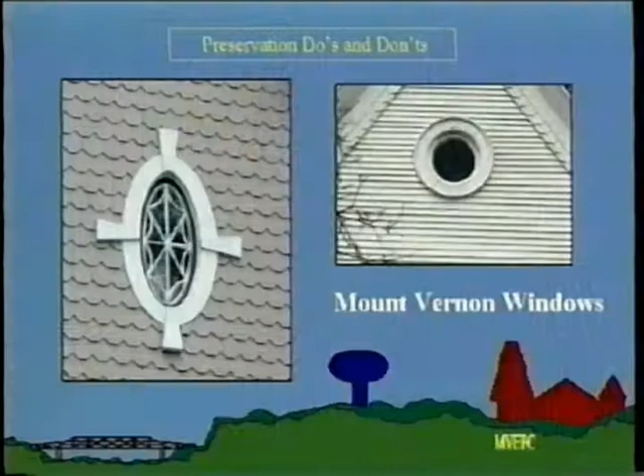I probably spent two days driving around, and we have some great windows in Mount Vernon, ranging from the oval oculi with multiple divisions to Gothic revival type of windows, arched windows, circular, semicircular.

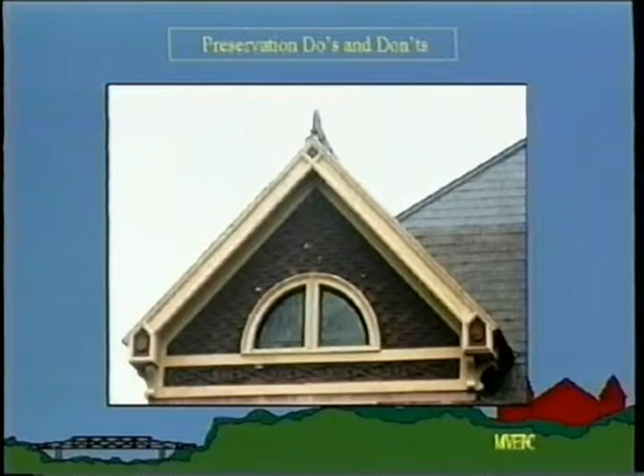There's a couple of neat, what I call eyebrow windows. You know, you see the roof plane sweeping down, all of a sudden it looks like there's an aberration in the roof that comes up, and there's a little window stuck in there. It's one of those things that until you go out and drive around town with the specific purpose of looking at what's there, you don't even notice it.

And I've lived here for 25 years, and unless I go out and specifically look for a specific feature, you don't see them. I mean, I always knew that there was a Palladian window. That's the window with two rectangular windows on the side and a middle one with a circular arch on it. I always knew there was one of those on the Kepler house, but I found two others in town that I didn't even know existed.

So until I went out with the specific purpose of taking pictures of different kinds of windows, I didn't know they were there. So just from a practical standpoint, the next time or even during the noon hour, if you want to go for a walk around town, you don't have to vary too far from our business district here to find some very unique windows.

But anyway, the first thing you do when you have a window in an older house is you want to perform an evaluation of that existing window. First of all, is this an original window to that house? That's an important issue, because if it is, it takes on more importance than if it's a window that was installed in that house at a later time. Just because it was installed at a later time still doesn't mean that that's bad.

I lived in an 1850s house out in the country. The original openings were still there. The front of the house, they'd replaced all the windows. They were a 6/6 muntin pattern, but somewhere down the road they decided it needed a sash replacement. So they replaced it with a sash of the same size, but it didn't have any muntin patterns in it. If you're going to do something like that window, it doesn't necessarily mean you have to go back and replace that sash with a 6/6 sash. You're probably still better off taking the one that's there if it's in good shape and fixing it.

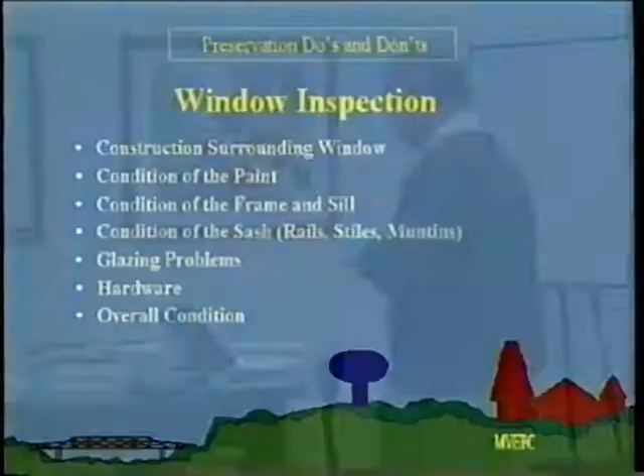Now the next thing, which is getting down to the more nitty-gritty, is to evaluate the condition of the window. The first thing you do is take a look at the construction actually surrounding the window, not the window itself, but what's around the window. The biggest factor that contributes to the deterioration of windows is moisture, unequivocally. You have vandalism, you have insects and a few things like that, but moisture is a bigger problem than the rest of them all put together. The moisture could be coming from the window itself, but it may also be coming from other construction around the window.

You may have a horizontal band board that goes around between the first and second story that has some problems, whether there's no drip there or water may be leaking in there, or the caulk joint around the edge of the window may be bad. So take a look around the edge of the window first to try to locate the source of the problem before simply replacing the window. Otherwise, you put a new window in there, and if you didn't correct that source, the same thing's going to happen to your new window.

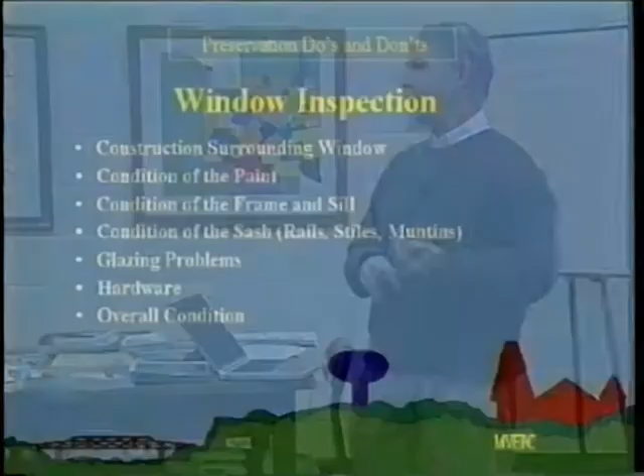Look at the condition of the paint. I see way too many windows, from my perspective, being replaced that really don't need to be replaced. They just got tired of painting them, or the caulk or the glazing compound is coming out. But paint is what protects that window. Very few of our windows today, unless you're getting a modern clad window, were designed to be natural. The paint is the vehicle that protects that window from the moisture. A good paint job, even if you've got a leak somewhere else, can probably extend the life of that window considerably.

Next is the condition of the sill and the frame. Other than the sash themselves, probably the next area that is most subject to deterioration is the window sill and then the side jambs where they intersect the window sill, because where moisture most easily gets into the window is the end grain, where it's cut off. You have that end grain exposed. It's just like a sponge in terms of sucking up moisture. So you have the sill itself, which can be a problem because water often sits on the sill, or the paint starts to buckle a little bit, and that paint can actually provide a dam to hold moisture there, allowing it to seep in.

And then where the side jambs come down and actually hit that sill, underneath there is end grain of the wood exposed, and that's really an area. If you go around and look at a rotted window, that's where most of the problems occur. But that's still not bad. There are materials out there today that you can actually use to reconstitute and restore those things if they're not in too bad a shape.

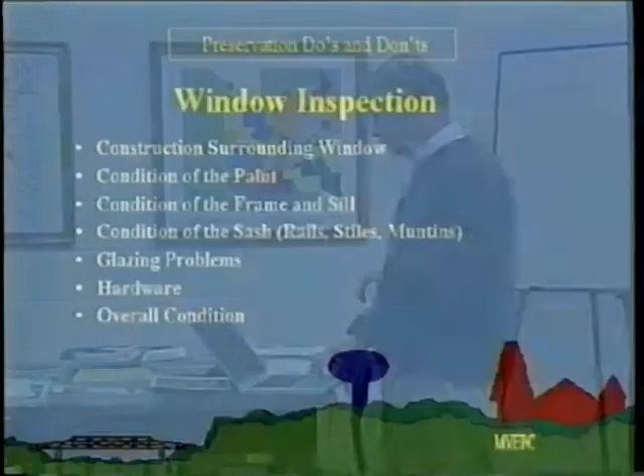The sash, and there we're talking about the rails, the stiles, and the muntins. If you didn't do so, you might want to pick up some of the handouts here; this one is sort of an anatomy of a window, and Mark, I think, is going to show us a little bit about the window. He's got one here that we can take apart and show you the different parts of it. That's the next part to go, especially where you have a side rail.

Hi, Tom. Come on in.

Especially where you have the side, the joint at the corner where the window sash corners meet, and also the muntin bars. If you have multiple muntins, because they are such thin components of wood, when they start to deteriorate, it doesn't take a lot of deterioration for that to become a problem.

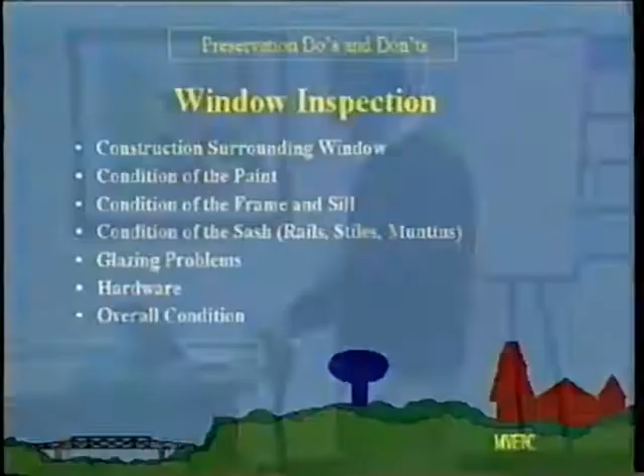And glazing problems. Frank's going to give us a little bit of information on glazing a little later, but just because the putty on the window is cracked and peeling up, that doesn't mean the window has failed. It will fail if you don't address that problem, but it in itself is not a bad thing. Too many people look at that and think, oh, I've got to replace the window.

Well, if you actually take the time and effort to, at the very least, replace that deteriorated glazing compound, or better yet, pull the sash out and reglaze it. This is something you probably won't have to do for another 30, 40 years. Probably as long as you own the building, this is probably the only time it will have to be done. So don't use that necessarily as an excuse to replace the window.

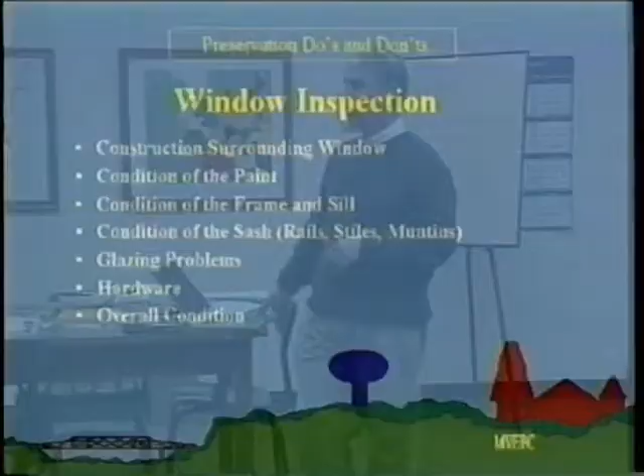And last is the hardware. There isn't much hardware with the older windows. They had a, can't remember what you call it now. Yeah, lock, yeah. They had a lock.

From a hardware standpoint, on the old double-hung windows or single-hung windows, the thing that typically goes wrong is the counterweight system. That's where you have the big weights that are in the channels in the side of the windows, and then usually they had a cotton cord, which probably is broken, and the weight's sitting there at the bottom, or some of the more sophisticated ones might have had a chain.

You can either choose to repair those. It's not that difficult. The windows were usually designed to be accessible so that those things could be repaired. They knew that that cotton cord was going to deteriorate and break over time, so they made the windows so those could be replaced. So you got a couple of options there.

One is to replace them, or you can go the other extreme, which I did on my house, which is to actually take all those things out, and I filled all those cavities with insulation, and then I put a friction replacement rail on the side. But those are a lot of different options. I'm not going to talk about those right now.

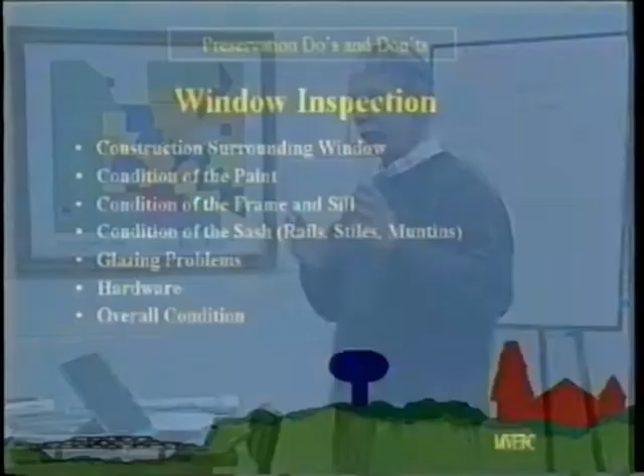After you've done all that, you've got the overall condition of the window, and now you have to make a decision as to how you're going to address that. And the four approaches, well, number one is maintenance. Glazing compound that is peeled up or is cracking, paint, those are just maintenance issues. Those don't even get into window restoration. Those are purely maintenance issues.

And replacing the glazing compound is something that has to be done probably once in the lifetime when you're in that building, if you're going to be there for 30 or 40 years. It's not something bad, but with proper maintenance, those windows that are in your house should be able to go for another 100 or 200 years. Unfortunately, it's a tough thing.

If you've progressed beyond the point where minimal maintenance is required, now you're into a concept called what we call stabilization. Now you've got maybe some rotten areas on the window sash or on the sill, or the wood is just in very bad shape. In other words, it's been exposed to moisture long enough that it's curled. Now you're into a point of stabilization.

There's several products available on the market. One in particular that I've seen used, I haven't used it, is an epoxy compound called Abatron, which actually comes in a liquid form or a putty-type form, and you can mix that, impregnate it into the wood, and the wood will be at least as good, if not better, from a maintenance standpoint than it was originally. As long as there's some structure left of that wood, this product fills in the voids, and it can be sanded and painted, and now you're into what's called stabilization.

If you've gone beyond that, now we're talking about actual parts replacement, not replacement of the entire area, but you may have part of that sill that is so rotted that it won't even take the Abatron. Well, again, rather than tear out that entire window and replace it, take a look at taking a portion of that sill. If it's going to be painted and you do a good job of replacing a part of that sill, you'll never know the difference.

Again, nobody's going to come up and walk around your house and look at every little detail of the sill and say, okay, well, that looks like they must have cut out a part of that and replaced it. Even if they did, so what? But now you're in the parts replacement, and this also can go in terms of the window sash itself. It may be possible to replace a portion of the sash, although that gets a little more tricky.

When you get into these areas, you're probably outside of the do-it-yourself area. I would recommend, unless you're very adept at this kind of thing and have done it before, that now you start pulling in professional help. It's still a labor-intensive process, but it's probably always going to be cheaper than actually replacing the window.

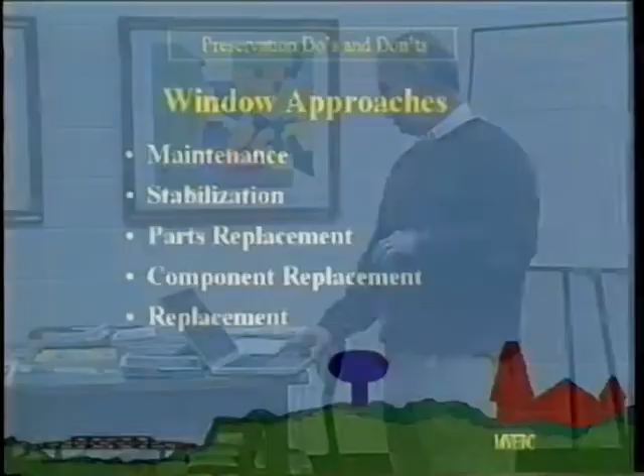Next one would be component replacement. Now we're talking about something where you'd actually pull out the entire sill, or maybe you take out the sash, they're beyond hope, and now you replace the sash. And we'll get into a little bit about what you should replace those sash with a little later.

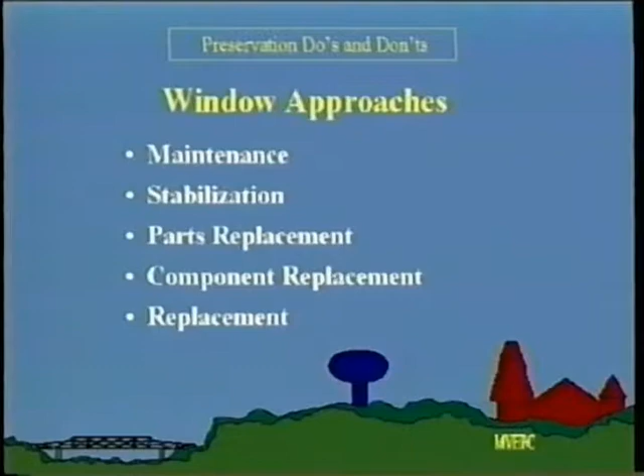And last is replacement. In other words, now you're taking out the entire window frame and everything and replacing it with a replacement unit. Fortunately, the window companies, and we have a representative here today, have become much more sensitive to replacement of windows than what they used to be. 20 years ago, it was a matter of, here's the window we have, you modify that opening to fit our window. And now they've gone to the other side, fortunately. Now they'll make their windows to fit the opening.

And furthermore, you can get a whole multitude, depending on manufacturer. You can get true divided lights. You can get muntins that look like they're true divided lights. So the new window companies have gone a long ways in terms of providing replacement windows.

Also, we'll have a presentation today from people at Adams Architectural Woodwork. They have another venue. There are times when it's even tough for Pella and people like that to make a window for a historic building, and I've used them on the Hawk building downtown, even my building down here, and they've done several replacements. That's another avenue, and they actually reconstruct, build a window that may be almost identical to the one that was there originally.

So those are two options when it comes to replacement: having basically the old window, if you've got enough of it remaining, reconstructed, or you can pick a new window that is really much more history sensitive than their counterparts.

I'm going to go through this fairly quickly, but this is sort of do's and don'ts for not only restoration projects, but also if you're contemplating additions and things like that. And most of this stuff is covered. Make sure you pick up one of these if you don't have one. We spent a couple years developing this. This is the design guidelines for the city of Mount Vernon.

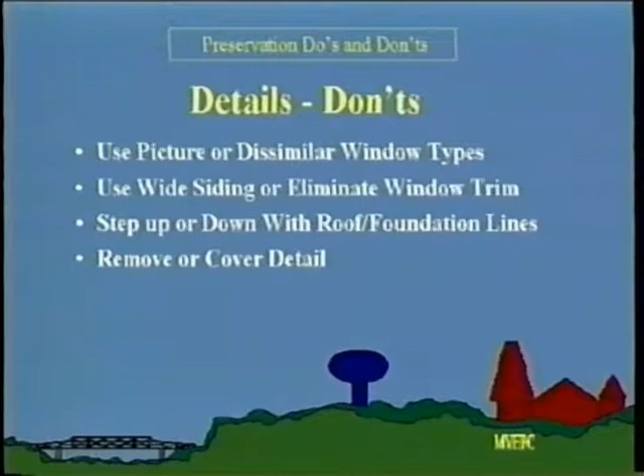One thing with regard to additions: windows and additions. When you're putting an addition on, if your house has double hung windows that are in pairs, for example, strongly consider using double hung windows and trying to put them in a paired pattern as opposed to a casement window 5 or 6 wide. These are very fundamental things, but most people, when they do something that's considered inappropriate historically, it wasn't because they did it on purpose, it was because they didn't take the time to consider what they were doing.

So all I'm asking you to do is when you design an addition or have an addition designed for you, take a look at it from the standpoint of here's the existing house, here's the addition. If that original architect or the original carpenter were to build this addition, what would he have done? There's a popular phrase out there. What would he have done? What would the original builder have done if he were putting this addition on?

Would he have put big casement windows in when they had pairs of double hung windows? Probably not. Even if the technology were available, he might have used casements in the original, but he would have used those also in the addition. So give some thought to that with regard to windows.

Height-wise, also pay attention to the size and proportion of the windows. There are some houses around here, I know the Freeman Swanson house is a classic one. It's got very tall windows, but they're very narrow windows. When you're doing an addition, we did a porch addition there, and so we took the narrowness of that window and put it in one of the little porch additions.

So pay attention to the scale and size of the windows. Just because they use double hungs there doesn't mean any double hung window will work in the new addition. Pay attention to the size and proportion of the windows. And there's also some flexibility there. A double hung window, or single hung, basically looks like 2 big panes, one over the other. Sometimes it's not the same size. Sometimes you'll end up with a taller upper one and lower one, and those can be replicated in new windows.

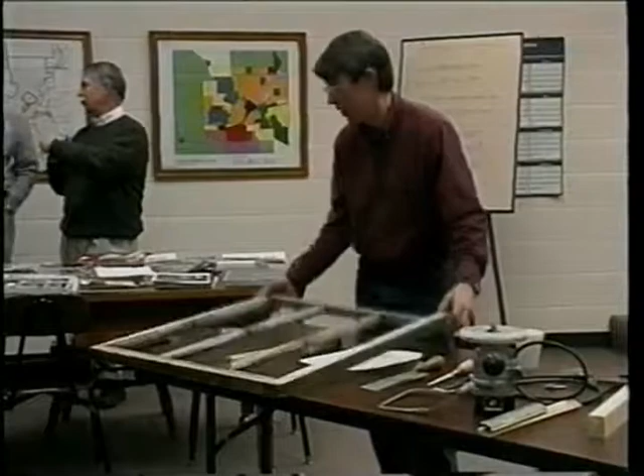Let's see. Are there some advantages to the stub versus this other one? Well, I haven't really sat down and tried to figure out why they use a dovetail at the check rail, where this is the top portion of the window. But it is a traditional technique. And just thinking about it, it's because of the structure of the joint. Let's see. What it does is it prevents this piece of wood from being lifted. So I suppose as you're pushing up the sash, it adds extra structure there. Given what it tended to do, it kept it below the surface.

Does that give similar strength? Yes, but limited, because in order for it to have real strength, it would have to be a good quarter, half-inch deep, so it shrinks the size of your joint. And let's see. Are there any questions you folks have? I think I've covered what I wanted to.

How old do you think that window is? I think it's, I'm not sure. Maybe you could say better. Real old. Real old? What do you mean by real? It's an inch and an eighth sash, which means that it's handmade, and it's got handmade dovetails in the components, and plus, Mark and I were measuring, the muntin's only a half-inch wide, which means that it's very old. Really? Nobody did muntin that narrow in a commercial milling application, so it was certainly made locally by hand, which is why its preservation is utterly critical, because you won't find handmade stuff like that very often.